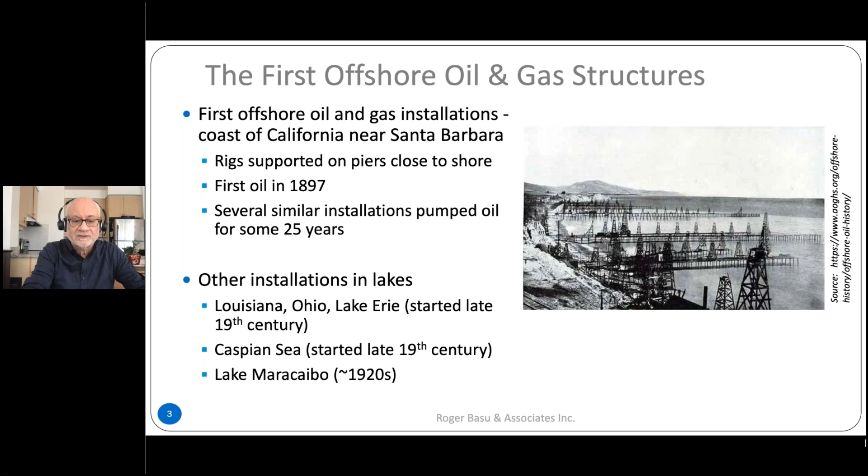So in the late 1930s, the focus shifted to the Gulf of Mexico, and that still is the main offshore oil producing area in the US. And you saw this sort of steady evolution of taller and taller structures.

1947 is often used as the starting date for these, in fairly shallow water, about six meters. Eventually, as they moved into deeper and deeper water, they got up to around 100 meters of water by 1967.

At this point, other parts of the world were opening up in a big way as well. There were already installations in the Persian Gulf, off the coast of Malaysia, Indonesia, and so on, but all fairly shallow waters.

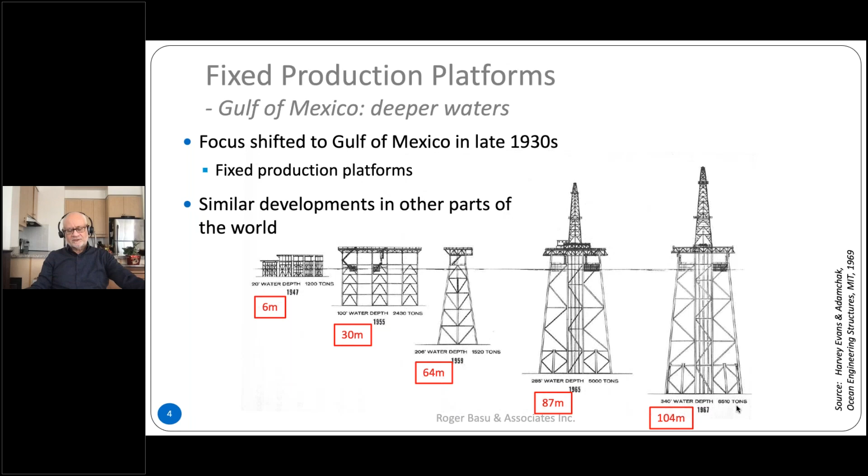The interest in deep water, I'd say, started in the North Sea, and this is the first time I got involved. The picture on the right is a structure I worked on, the Thistle Alpha platform, installed in 1976 in 162 meters of water.

Basically, a lot of the initial work was done by US engineers, who adapted their Gulf of Mexico type designs for the North Sea. The big difference was the climate was pretty severe in the North Sea compared to the Gulf of Mexico, if you exclude hurricanes. I remember the design wave height we used for structures like the one shown was 30 meters. This is quite a massive design wave, but it reflected the severity of the North Sea climate.

This is my experience, but at the same time there were other, more innovative structures going into the North Sea, especially in the Norwegian sector, where they started to use concrete in a big way. Many of you will know about these - the Condeep platforms and so on, many of which are still there. But I won't talk about those too much.

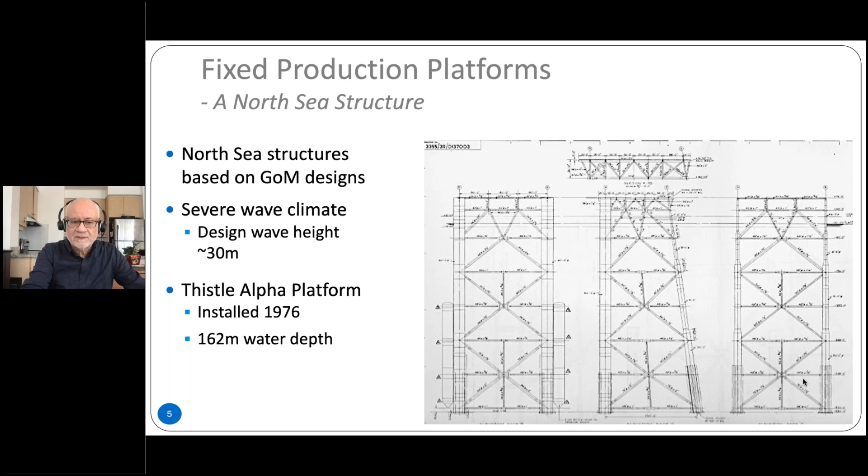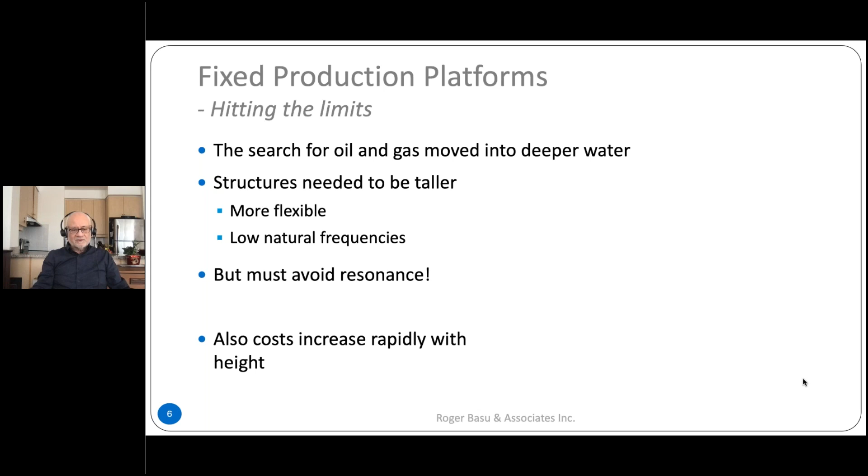This is a simple graphic depicting energy as a function of frequency for waves and for wind. Waves have frequencies of the order of 0.1 hertz, or a period of 10 seconds or so. The typical tall platforms I just showed had periods of the order of 3 to 4 seconds, so you're well away from the energy-bearing frequencies of the waves.

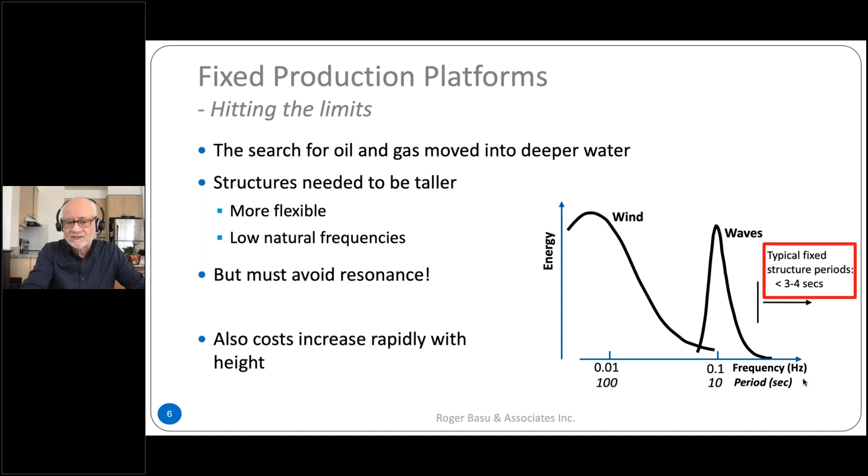But the danger is, the taller you make these structures, the more you start to attract resonant conditions from waves, and also the costs go up quite rapidly. So what did engineers do? They said, we can't make them taller and have the same sorts of stiffness - what if we make them deliberately much more flexible and avoid waves altogether?

So you got this class of compliant structures that were built. Some are still operating, even in the Gulf of Mexico, and there certainly used to be some off the coast of California - I don't know if they still exist, but I know the Gulf of Mexico ones do. They avoided the wave problem entirely by making extremely soft structures, with periods of the order of 30 seconds.

It's hard to imagine, but if you were on top of one of these structures, it would move back and forth, taking half a minute to do so - quite gentle movements, but nevertheless the deflections were quite significant. I can't remember the exact numbers offhand, but we got up to depths of 530 meters of water, which is quite deep for a fixed structure. But this is the limit.

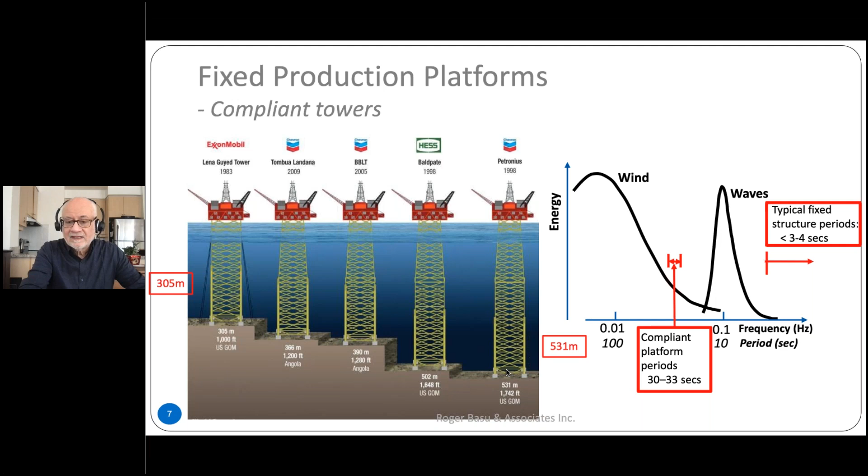If you make them even bigger, you start to attract forcing from the wind, because wind has energy in the kinds of frequencies we're talking about. So then we had to move to floating production platforms, and there's a variety of different kinds of these structures. Unlike the fixed structures in North America, the steel ones, which were all frame construction, you had a variety of different kinds when it comes to floating.

Looking very quickly at the kinds of structures out there, starting with the compliant one on the left that I talked about - that was the last of the very tall fixed structures. We started to move towards newer concepts, one of the first being the TLP, the tension leg platform.

A couple more bits. The next is what they've called a semi-FPU here, but we're more familiar with it as a semi-submersible. I'll postpone discussion of that till later, because it's a kind of special case. Actually, these existed before TLPs, so they've been around a long time, but I think it's kind of a special structure.

The next new variant was the spar structure, with several configurations. There's actually a lot of overlap between TLPs, spars, and FPSOs. What's shown here is a ship-shaped FPSO - I'll talk more about each of these in a minute. Left of that is another FPSO, but an unusual one: it's circular rather than ship-shaped, with a circular-shaped hull.

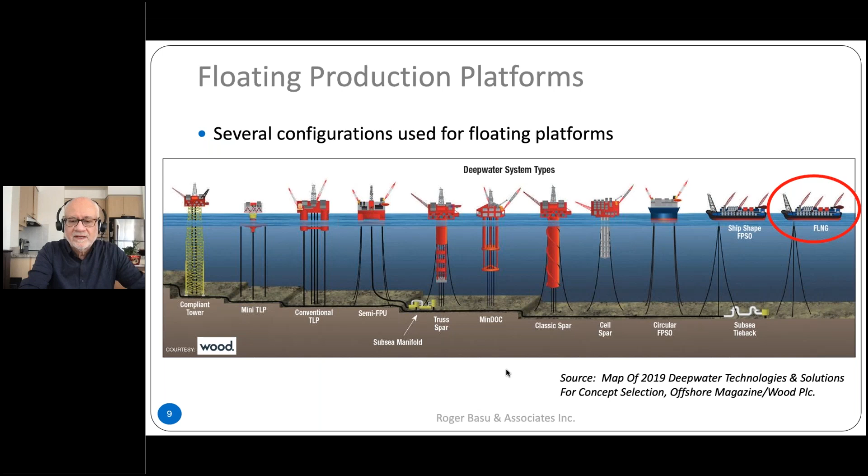If we look at each of these a little more closely, the TLP was first installed in 1984 in fairly shallow waters - the kind of water where you could easily put a fixed structure. I wonder if it was a kind of experiment, if you like. And it went in the North Sea, not the Gulf of Mexico. Then about 30 of these have been installed in various places, but almost all in the Gulf of Mexico. Chevron's Bigfoot TLP holds the record in terms of water depth, almost 1,600 meters.

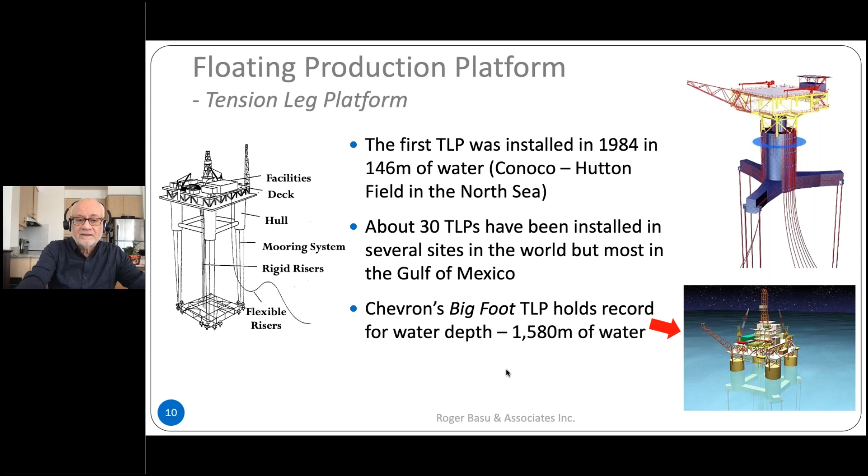Moving to the spars - the deep draft spar is a concept developed by an engineer called Ed Horton. I was in Houston later after that period, but there were a lot of stories going around in the industry, and one was that Ed Horton developed this in Houston in his swimming pool, using empty beer cans and Coca-Cola cans to do experiments. It's probably true because I heard it from very reliable sources.

Getting back to the spar, three different configurations were developed: the classic spar, truss spar, and cell spar. The classic one is the first design you see on the left, basically a big tube, and you'll see those strakes around it - that's to stop vortex-induced motions, which is something you do worry about in the Gulf of Mexico.

In certain parts of the Gulf of Mexico we have loop currents, and the currents are quite high. So there was a danger that vortex-induced motions would cause quite severe motions of these installations. The idea of the strake is to break up the coherence of that vortex shedding process.

The next one is the truss spar, partly to address the vortex-induced vibration problem, but also solving other issues. I guess it's a little lighter - truss construction is usually the lightest you can make. I know the bottom plate was there for a specific reason - it's called a heave plate, and it tries to minimize the heaving of the structure.

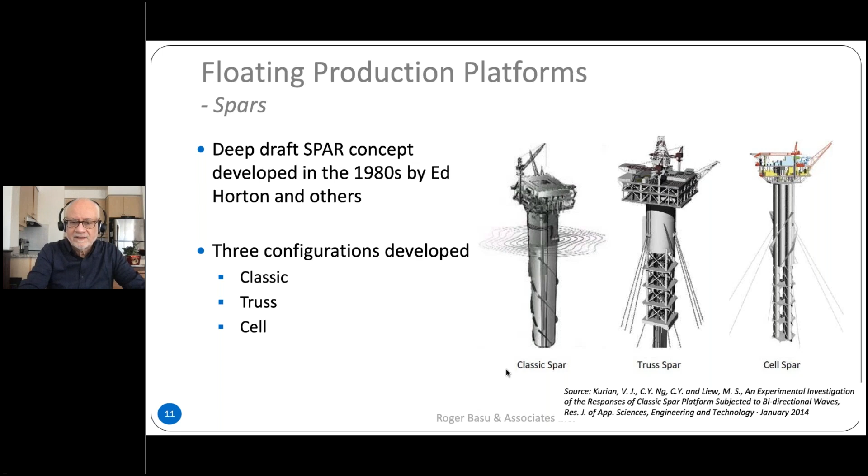The last one is the cell spar. I think only one of these was ever built - it's basically replacing one large tube with a number of small tubes, and that was more from a construction point of view. It could be built in lots of different yards, whereas the ones based on large tubes could only be built in a few yards. So that's the origins of the spar.

The first production platform saw service in 1997 - the Neptune, which I think still operates in the Gulf of Mexico, in 588 meters of water. There are about 21 installed, most in the Gulf of Mexico, just 2 in other areas. And now you're getting into really deep waters - Perdido is in the Gulf of Mexico, in almost 2,400 meters of water. These spars tend to be heavier than equivalent semis and TLPs.

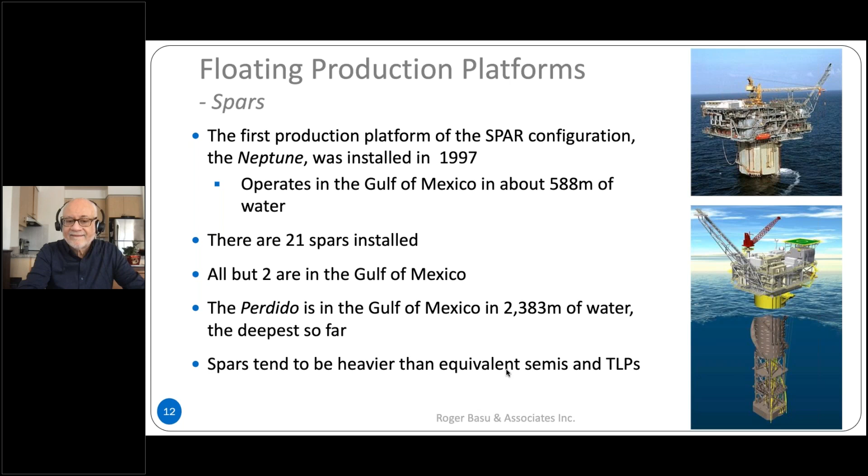Okay, going back to the semi-submersible, I said I would return to this. These are quite interesting - they have an interesting history. They actually started as submersibles, so that kind of configuration would be towed to site, and then they would ballast the pontoons.

It would sit on the seabed, and they would do whatever they needed to do, usually exploratory wells, drilling exploratory wells and the like. But one thing they did notice is that in transit, when moving these units, the motion characteristics were unexpectedly good. That was mainly because the pontoons were quite a lot below the surface of the sea, so the wave motion wasn't having as big an effect as it would if it was on the surface.

So it evolved from that. They've been around a long time. It's the second most popular floating production system. You'll see them in many parts of the world: Brazil, North Sea, Gulf of Mexico, they all have large numbers of semi-submersibles doing production work. The deepest water, again in the Gulf of Mexico, is the Independence Hub, still operating.

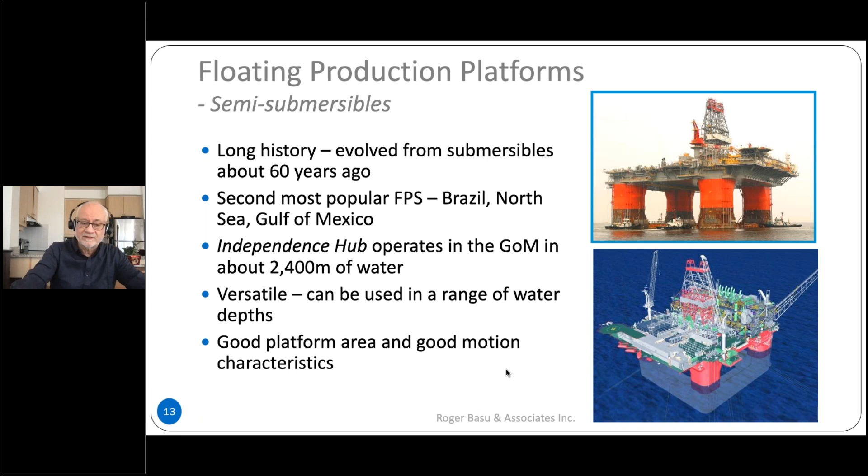The semi-submersible is really versatile. It can be used in a range of water depths. It's similar to the FPSO in that regard. It has good platform area, just the nature of it. It's unlike the spar, where your whole processing plant is over one tube. You can spread it out. In the case of the semi-submersible, you've got 4 legs, and you can put them fairly far apart, so you have a nice area to work with. And it also has reasonably good motion characteristics.

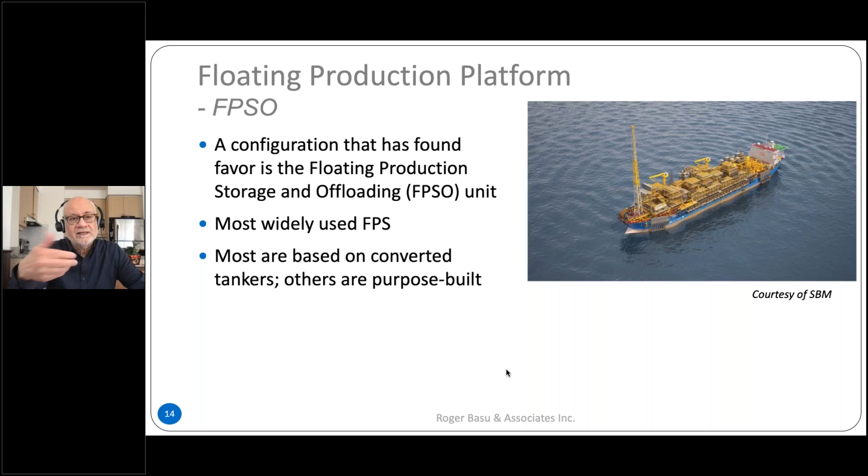Now, the FPSO is the most popular floating production system. It's basically a ship-shaped structure. The hull is used for storage, and it supports the plant on top. It's quite crowded. Most are based on converted tankers, so tankers that have maybe got another 5, 10, 20 years life will be converted for oil and gas extraction purposes. Very attractive in places where you don't have a lot of infrastructure in terms of pipelines and so on. So you have to store the oil, at least temporarily, and a shuttle tanker would come and remove the oil.

So in concept, that's quite similar to the FLNG. The same sort of thing, but this has an added sophistication. It not only extracts the fluid from the seabed, but it also processes it and turns it into liquefied natural gas. If you look closely at this one, this is the Prelude off the coast of Australia. It's very, very compact, with a lot of equipment on board the vessel. It makes it kind of large, almost 500 meters long, as you can see from the numbers down there.

And alongside, you see an LNG carrier. This is a shuttle carrier. So every so often it'll come along and take off the LNG and move away, and then come back a week later or whatever the cycle is. So that's the last of the floating production that I wanted to talk about.

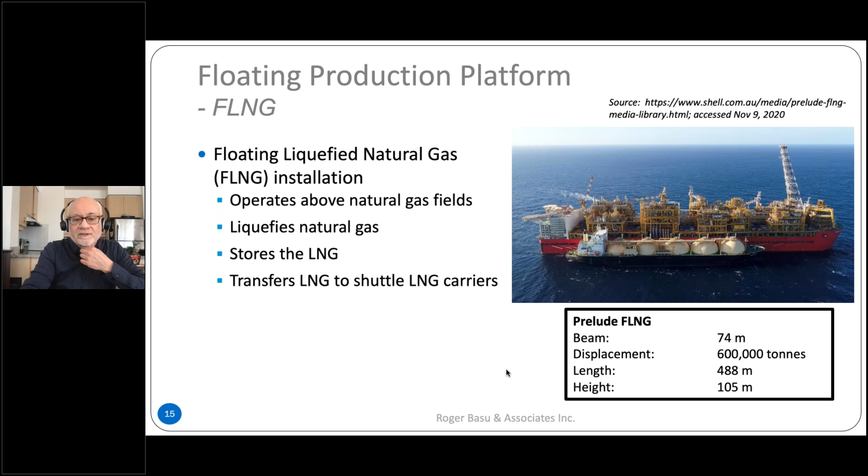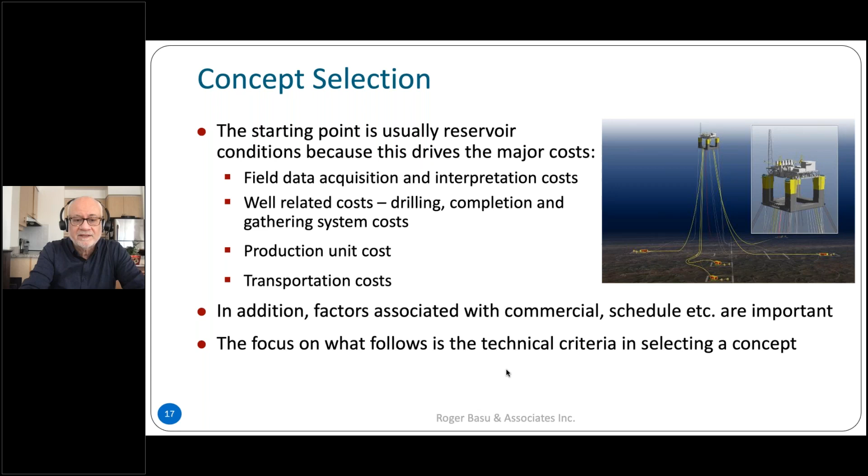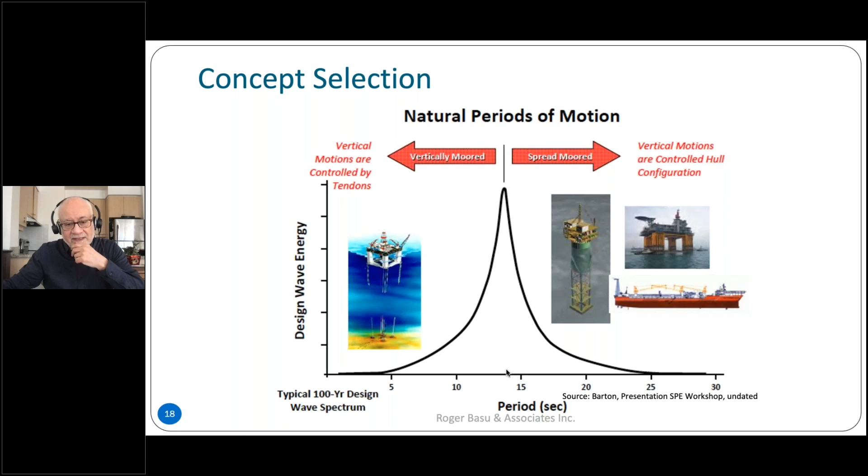For example, under functionality, it talks about dry and wet trees. That's the sort of equipment that interfaces between the well and the installation. If there's a lot of movement in your structure, like a semi-submersible or an FPSO, you tend to put these on the seabed. If you can, you put them on the installation, as you often do with spars and TLPs, because that equipment is easier to get to, easier to maintain and repair, and so on.

Water depth is another major consideration. Things like spars and TLPs are better for deeper waters, and that goes to the previous graphic I showed, where the frequencies matter. Semi-submersibles and FPSOs are much more flexible in that regard. They work in any kind of water depth, any reasonable water depth.

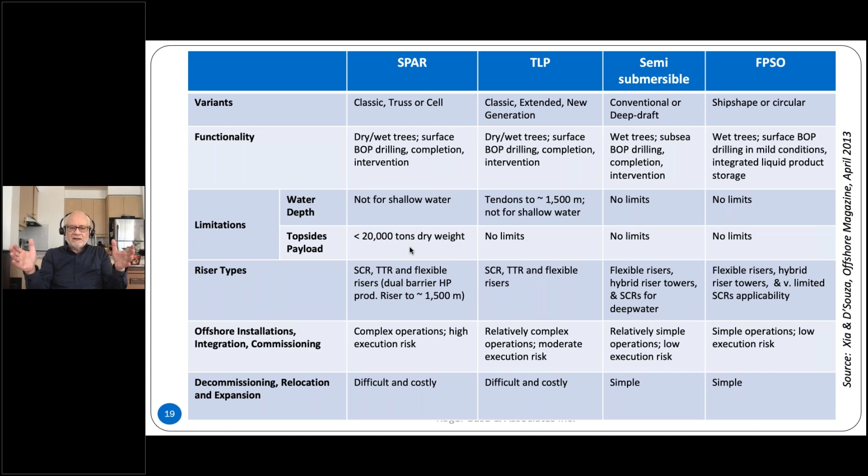Okay, payloads. Again, this is fairly obvious that the spar has some limitations. The others don't have any real limitations, but the spar does, because you're basically supporting the whole installation on one big tube, so the platform area can't be that big. Hence, they tend to be on several levels.

Riser types are again associated with movement. If you're more restricted, if you've got installations that can move around a bit, you have to use flexible risers in that case, but you have more flexibility when using platforms that are stiff and don't move around as much.

And the last two categories are to do with installing, decommissioning, and commissioning and all the rest of it. The easiest ones to talk about are semi-submersibles and FPSOs. You just get towed to site, you put down some moorings—I'm oversimplifying, I know—but it's relatively simple with a semi-submersible or an FPSO.

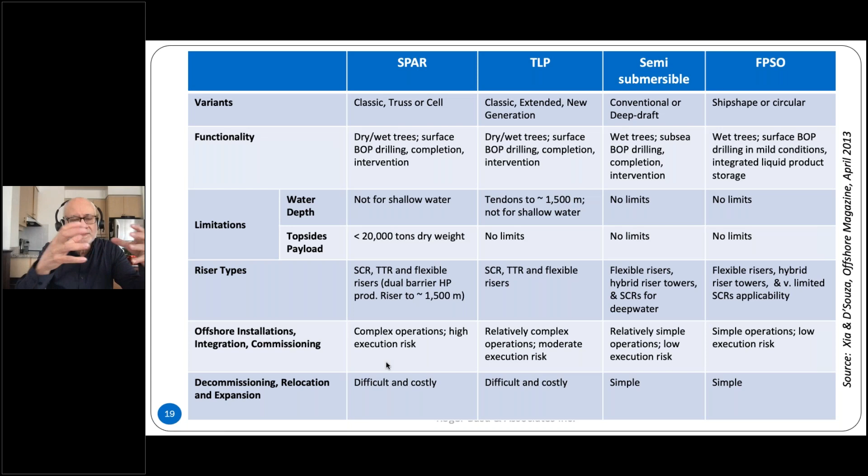TLPs and spars are much more difficult to deal with, especially the spar, because these usually go out floating on their side and then are upended, and then the moorings are added. So decommissioning something like that is much more involved than an FPSO, which is basically a ship and can be towed away relatively easily.

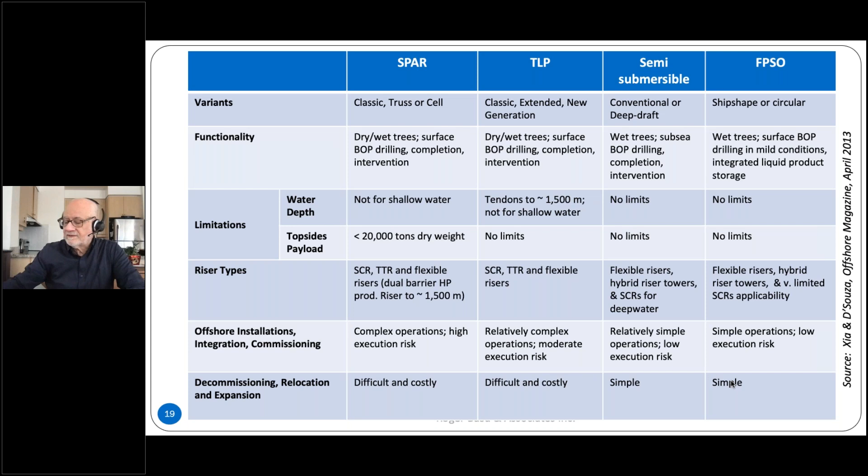Okay, just a couple of words about drilling platforms, because it's kind of relevant to some of the stuff we talk about later on, right at the end of the presentation actually. I've already talked a bit about semi-submersibles and submersibles, so I won't dwell on that. But these are units that you need typically for a short period of time, not for 20 or 30 years, but for several months while you're drilling exploratory wells.

And if the field turns out to be interesting to the operators, they'll also want some production wells to be drilled. They'll be capped and moved off, and then a production system will come and that will be installed. So again, water depth is the important determinant of which one you use.

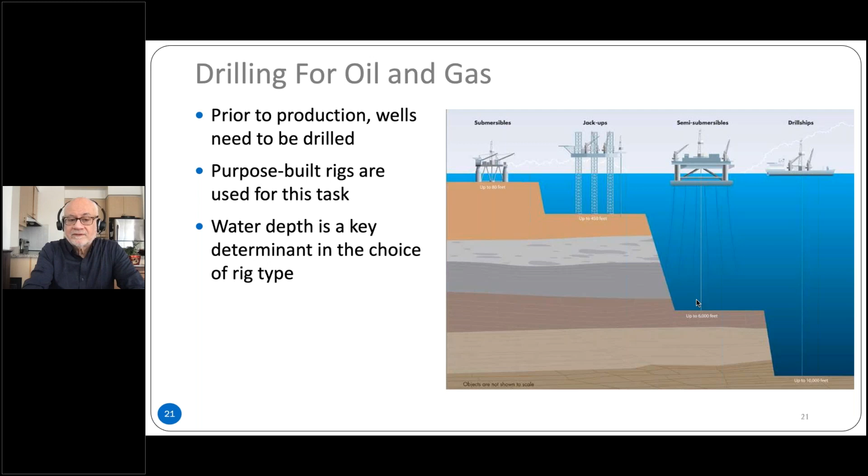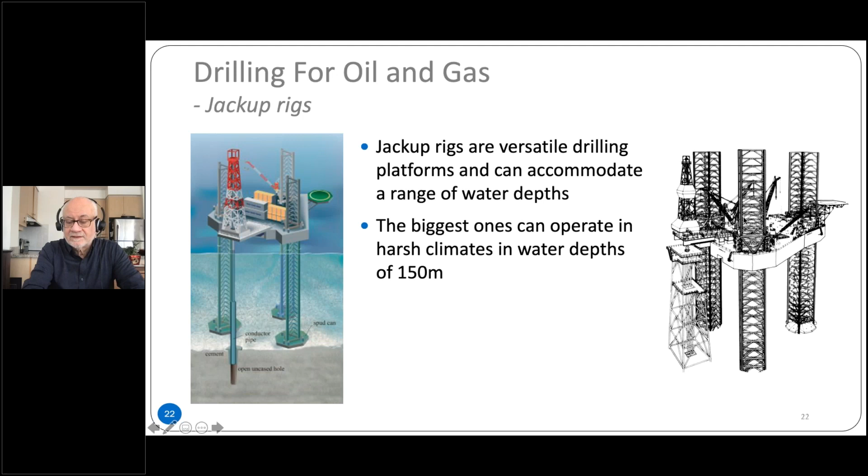If it's relatively shallow, up to about 150 meters, jackups are a very attractive option. They move around like a ship—the hull acts as the flotation. They can be towed like that with the legs up in the air, basically. And then when it gets to site, the legs are jacked down and you get a nice firm foundation to do your drilling.

If it's deeper than that, you use things like semi-submersibles and drill ships. As we've discussed before, these are quite flexible units in terms of water depth. You can have them in shallow waters—in that case you use moorings typically. If you're in deeper waters, it's usually done by dynamic positioning, so you have thrusters that keep it in place. It's kind of expensive because you use a lot of fuel when you're trying to keep it positioned, especially if there's big currents and waves around.

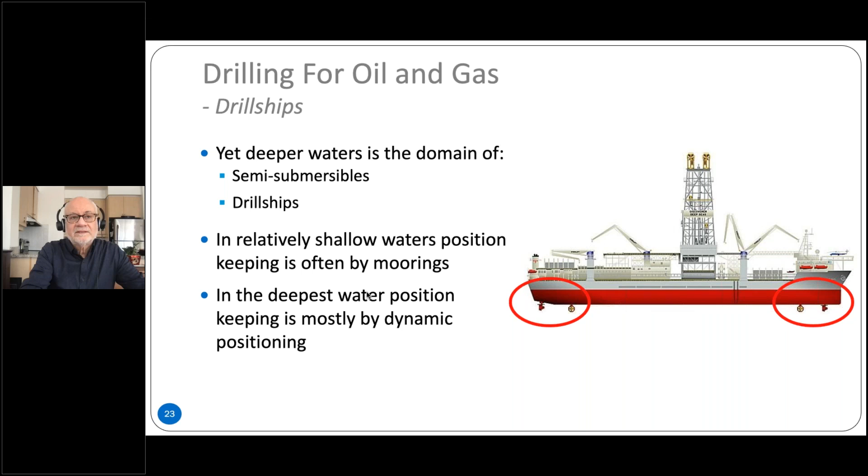Okay, so that's a quick survey of fixed and floating offshore structures. So I think I can move to offshore wind. The focus here is going to be a bit different—I'm going to go back earlier. We are just in the beginning stages, at least in the US, so I wanted to set the scene. The first graphic I'd like to start with is the transition that's happening in the US, and this will give you a very good idea. Actually, this kind of surprised me, and I suspect a lot of people will be surprised by this.

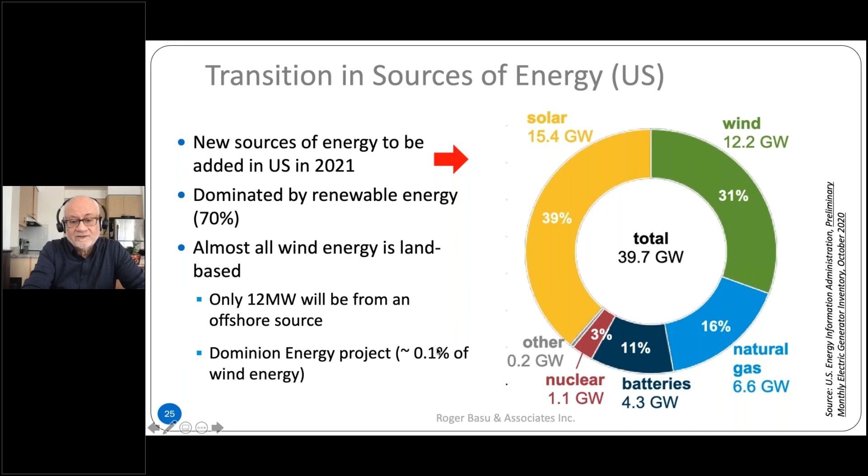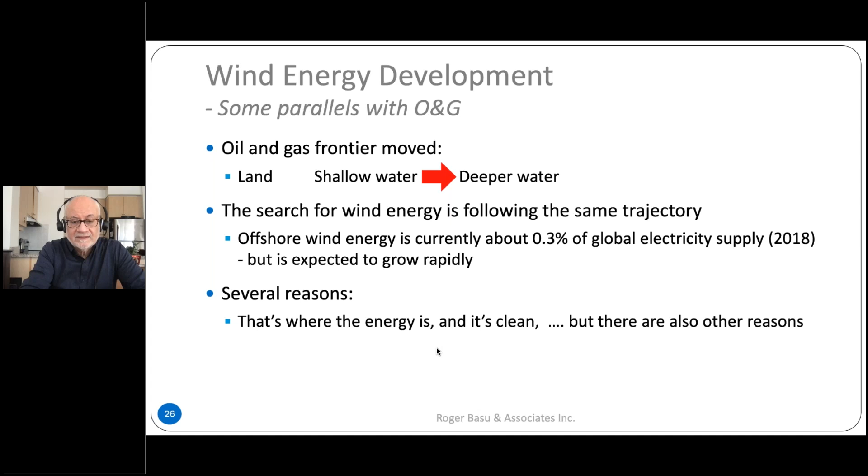So we start to see the parallels already with oil and gas development. We started on land, moved to shallow water, and then to deep water. So wind is following exactly the same trajectory. Offshore is currently quite small as a percentage of global electricity supply. I've got this number from 2018. I expect it's a little bigger now, but 0.3%, not a lot. But it's expected to grow rapidly, and we'll talk about that later on. There's several reasons for it. It's clean, obviously. We're in this transition to greener sources of fuel, but there are also other reasons. All right, so let's start with land.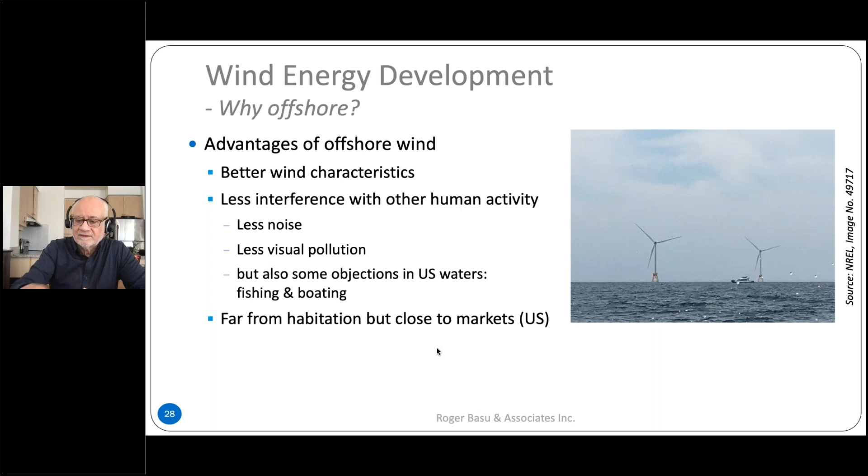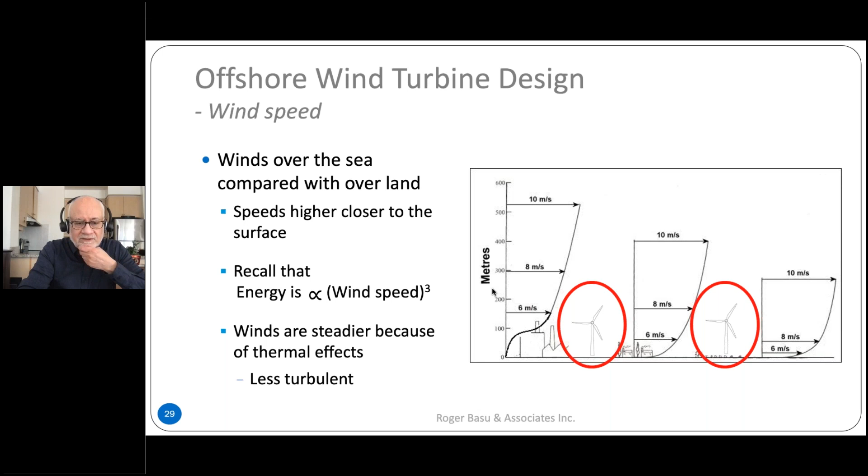This is the sort of thing designers of suspension bridges worry about, because you can get them up to, typically, 2,000 meters apart, one end to the other. So what's being experienced at one end is quite different to what's being experienced at the other end. So once you get these very large wind turbines, 15 megawatts and above, you're going to have to worry about these sorts of things.

The other thing that's less of an issue but sometimes important, because I've already seen people mention this in papers, is wind veering. This is not an issue if you're close to the ground, but if you start to move up into 100, 200 meters, wind veering might be an issue. Wind veering is the change of direction of wind as you go upwards, so that might be significant for something like a wind turbine.

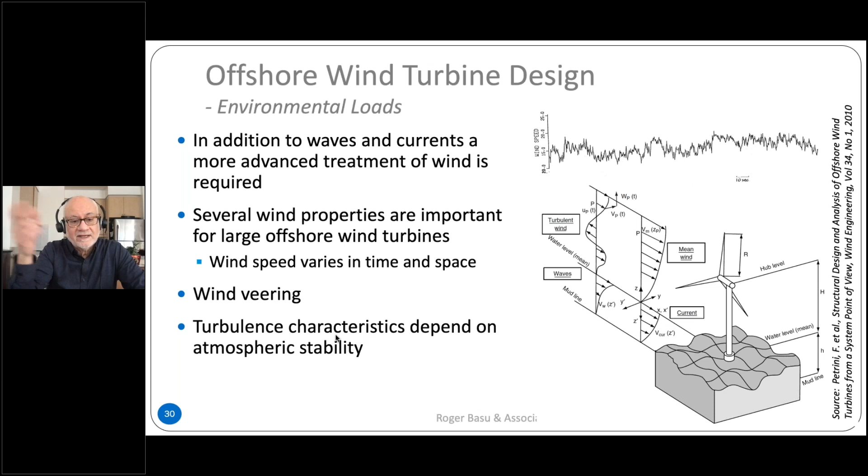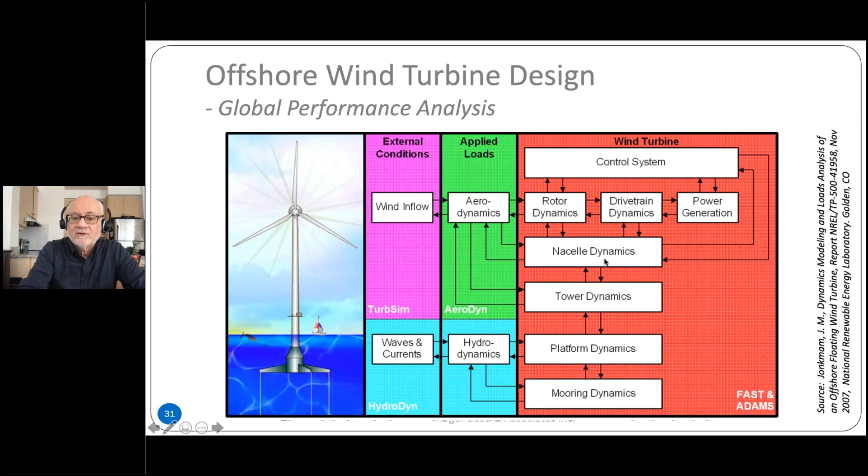If I take the wind and apply aerodynamics, I can get some aerodynamic loads on the whole system, and the same with the hydrodynamics, though that tends to affect mostly the platform itself. But it can affect all the parts of the installation above the sea level. You can see that it's an entirely highly dynamic system, so you have to have pretty good dynamic models of the wind, the waves, and the current, because they all play a role in the response of the system.

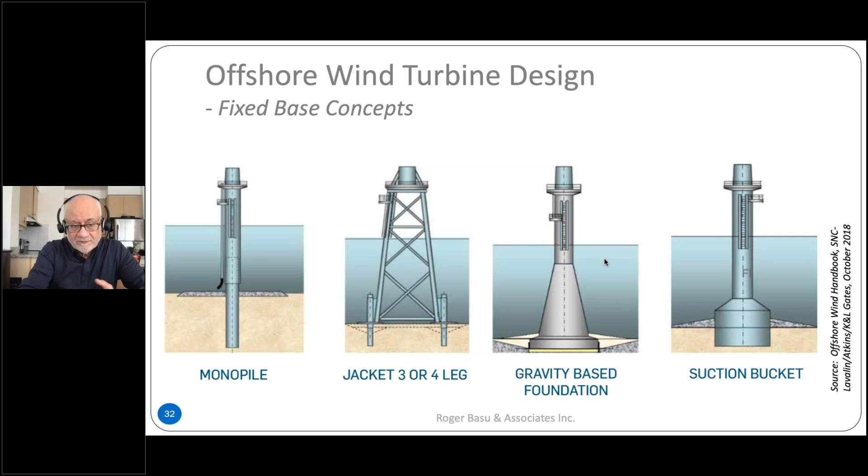Looking at the kinds of foundations these lines have, I've just put three or four out there - there are others. These are the typical fixed base concepts. When you look at floating concepts, you'll see some of the same terminology that was used in the oil and gas floating structures used here. Of course, they're already talking about different concepts that are unique to offshore wind, and that's exactly what you expect to see. That's what happened with offshore oil and gas - you started with structures basically adapted from the land, but then developed unique configurations more suited to the sea.

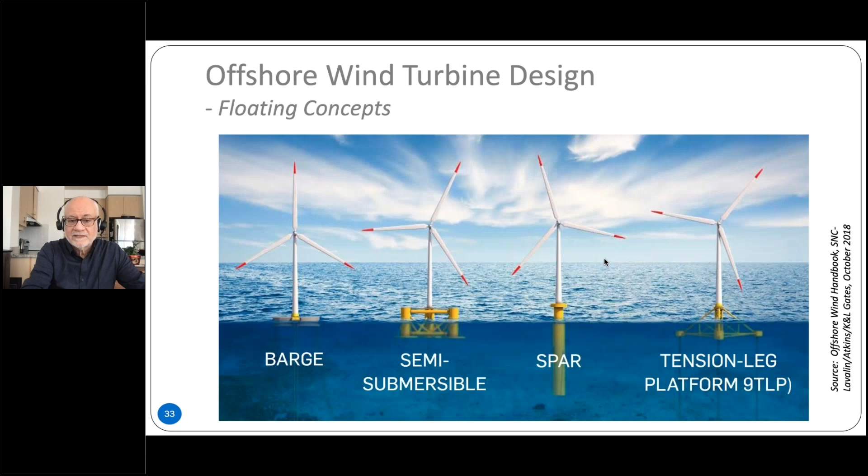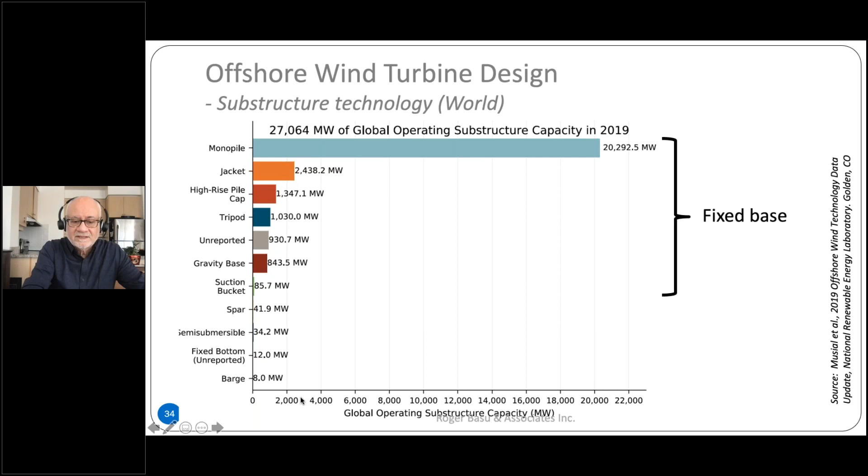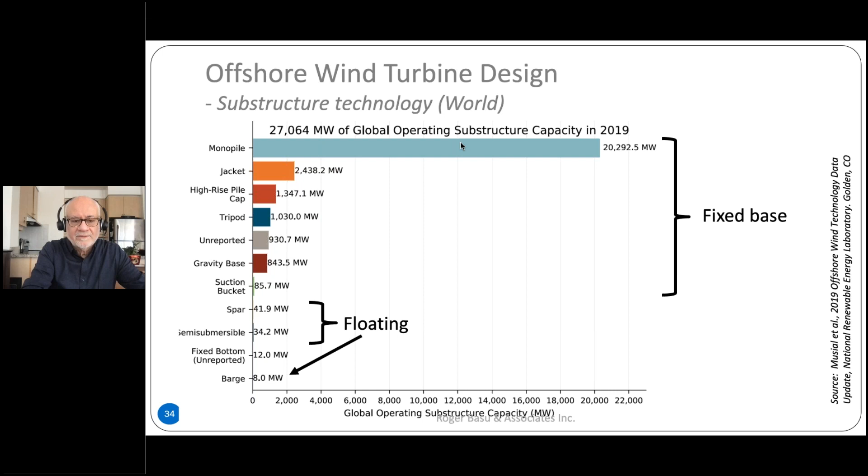We've talked about fixed bases and floating bases. What's actually happening? This is slightly out of date, 2019, but it will give you some idea. It's dominated by fixed base - the world's offshore wind turbines are almost all fixed base, and within that it's the monopile that dominates. This shows installations in terms of megawatts of power, what kind of foundation the installation has. So monopiles is more than fixed base and floating put together. There's hardly any floating installations as a percentage, but more are coming, as we know, some big ones off the coast of Scotland, and I believe Spain or Portugal - there's a new one recently announced. So for the time being, fixed base is what we're looking at.

Some of the challenges unique to the US context: hurricanes and earthquakes. I don't believe there's a lot of experience with offshore wind farms in these kinds of regions, and this is what we have to contend with offshore in the US. Hurricanes - the East Coast, where most of the focus is right now, is a hurricane-prone region. Some people argue you're going to see more and more of those in the future, and they might even become more intense, so it's a mixed wind climate. Not only do we have hurricanes, but we have normal storms too, so both are significant on the east coast of the US. Then once we move to the west coast, that's a very strong seismic zone, so you have to worry about the effect of earthquakes on your structures.

There's three issues I'd like to raise as to the reasons why the focus right now is on the east coast of the US.

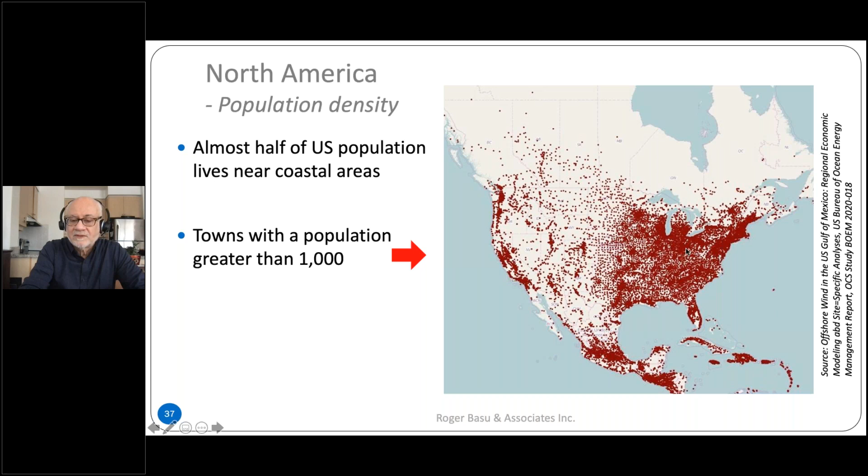The first is population. This graph shows all the towns and cities that have a population greater than 1,000 - just one way of showing population density. You can see that the population is quite dense on the east coast, especially the northeast, but all the way down to Florida and in the Gulf of Mexico, Texas and Alabama - all heavily populated. People like to live near the coast. The same on the west coast. So it makes sense to have wind farms close by to where your consumers are.

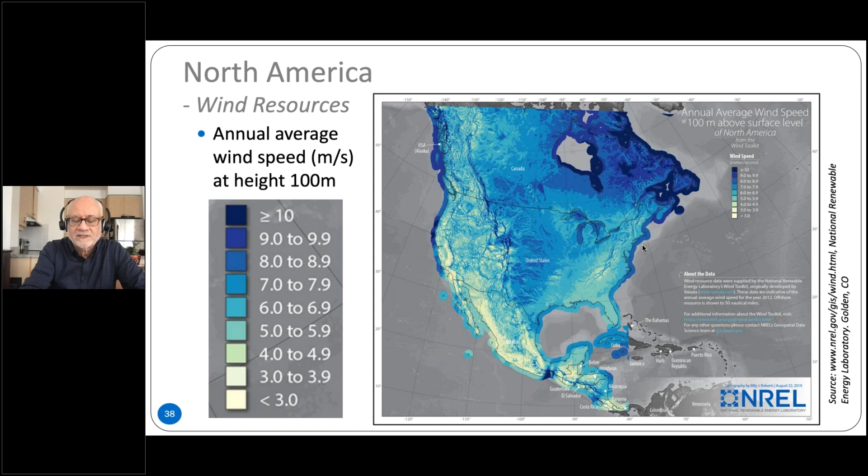The other thing is wind resources. This is a plot of annual average wind speed at a height of 100 meters - that's the region we're interested in for offshore wind farms, at least right now, maybe bigger later on. The darker the blue, the more intense the wind. The coastal areas see more wind for reasons we've already discussed - on the west coast, the east coast, less so in the Gulf of Mexico, but certainly the northeast and the west have very strong winds. So that's another reason why it's attractive to put offshore installations in the sea.

If you go to the West Coast, it's a different story. There's hardly any continental shelf - it goes out for a short bit and then dips down very rapidly. So installations there will be in more than 60 meters of water. That also applies to Hawaii, another area of interest for offshore wind farms. So those are the three reasons East Coast is very attractive: one is population, two is the wind speed I showed you, and then the large continental shelf.

Now this is something I was not going to talk about, but after listening to people who know more about the subject than I do, they say this is a bit of an issue. When European operators come to North America, their experience is quite different to what they're accustomed to in Europe in terms of getting permissions and so on.

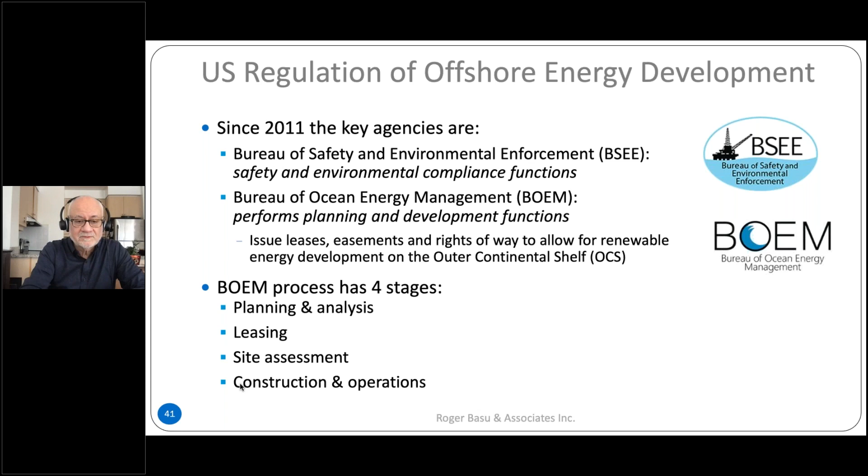The observation I've heard - I don't have direct experience of this, but more than one person has said - the US permitting process is quite complex and lengthy. You have to deal with at least 3 levels of government: local, state, and federal agencies. So there's quite a lot of interaction with government agencies, and these apparently present a challenge for how easy it is to get money to go ahead with your project.

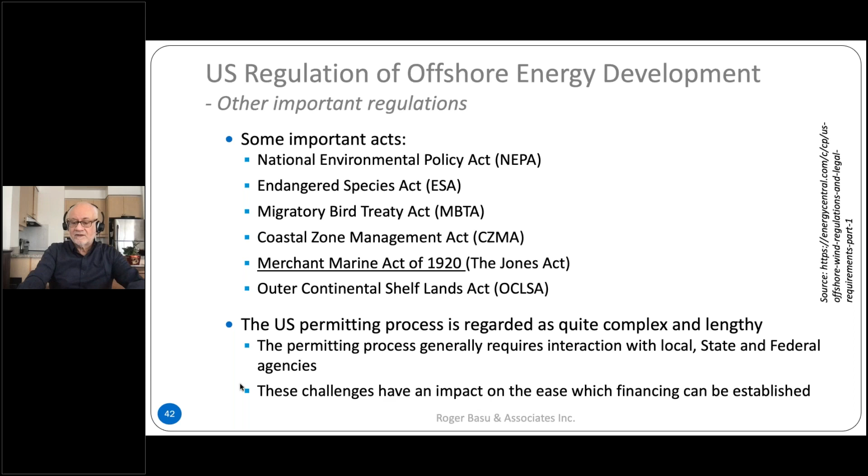Okay, the Jones Act. The basic requirement is that a ship traveling carrying goods from one US port to another US port has a number of restrictions. It's got to be 75% US owned, it's got to be built in the US, crewed minimum 75% by US citizens, and the ship has to be registered in the US - it has to be a US flag.

Of course, there's pros and cons. From the US point of view, it maintains a marine industry, you maintain a maritime workforce. So these are regarded as advantages.

The main downside from the point of view of offshore wind farms is the expense you have to go through to build a ship to provide wind turbine installation vessels, supply vessels, that kind of thing. This was only settled as an issue last month, or maybe in December, where they said offshore wind farm work is covered by the Jones Act.

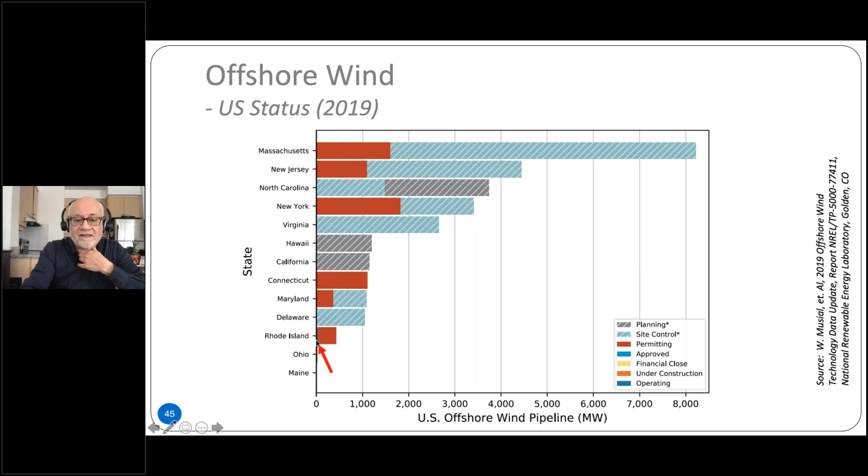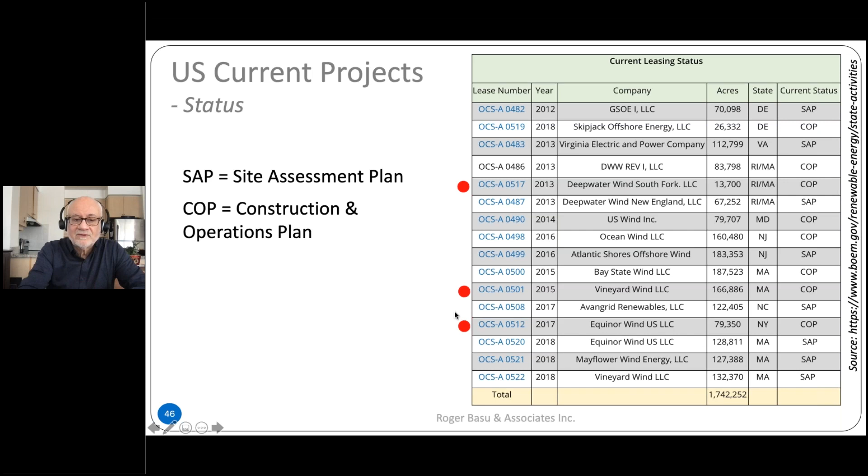And so it's the COP ones that are more imminent, they're close to becoming operational. I've highlighted 3 of them because those are the ones I'm going to talk about. But I'm going to start by talking about one that's not on that list, because this is the only operational wind farm right now in the US.

This is an Ørsted project that started back in 2016, a small farm, 30 megawatts. It recently had some problems with the undersea cable, they had to relay some of it, and that's actually been completed only just last month, so it will restart again. So it illustrates - once they lost this power, they went back on diesel generators. This island, Block Island, gets its power from diesel generators until we got the wind farms.

Okay, so the next one is the South Fork offshore wind farm, Ørsted and Eversource. Eversource is a utility company, so they've gone into partnership. This is going to be built off the coast of Rhode Island and Massachusetts. Even though it's regarded as a Rhode Island, Massachusetts project, that's simply because the farm itself is off their coast - all the power goes to New York. It'll travel westwards and make landfall in Long Island.

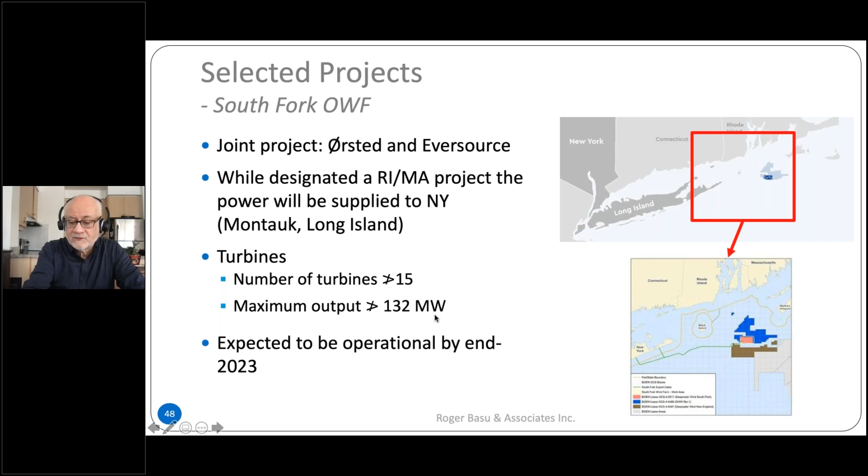They haven't defined the exact configuration, but they're saying there won't be more than 15 turbines, and the maximum output will be 132 megawatts. This is supposed to be operational by the end of 2023.

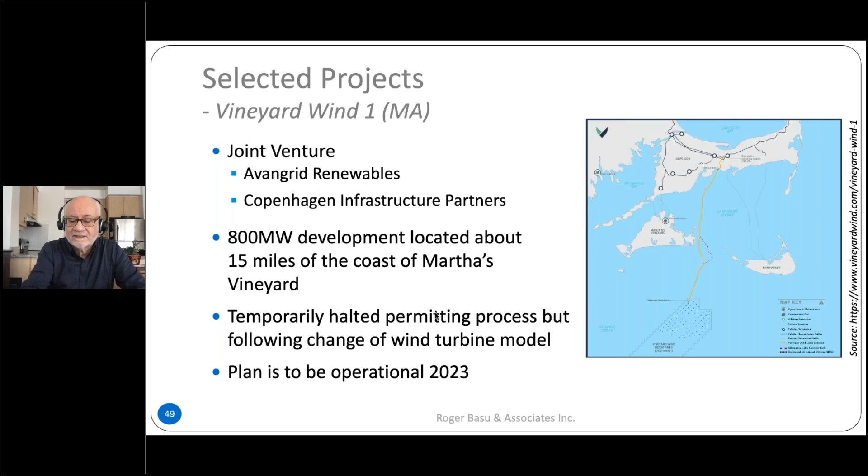The Vineyard project has got the go-ahead, I believe. It did stop temporarily. It's a much bigger development, jointly by Avangrid and Copenhagen Infrastructure Partners, 800 megawatts, almost getting up to 1 gigawatt, 15 miles off the coast of Martha's Vineyard, near Cape Cod, Massachusetts. In the middle of getting permissions from BOEM, they decided to change their wind turbine model, and that delayed things. But it seems to be back on track, and again will be operational by 2023.

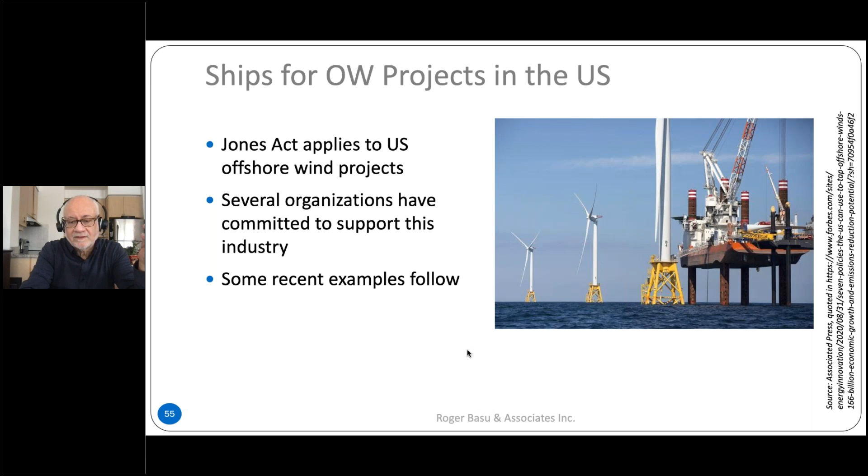They expect rapid expansion in the coming years. So just some examples of the ships that have been recently ordered.

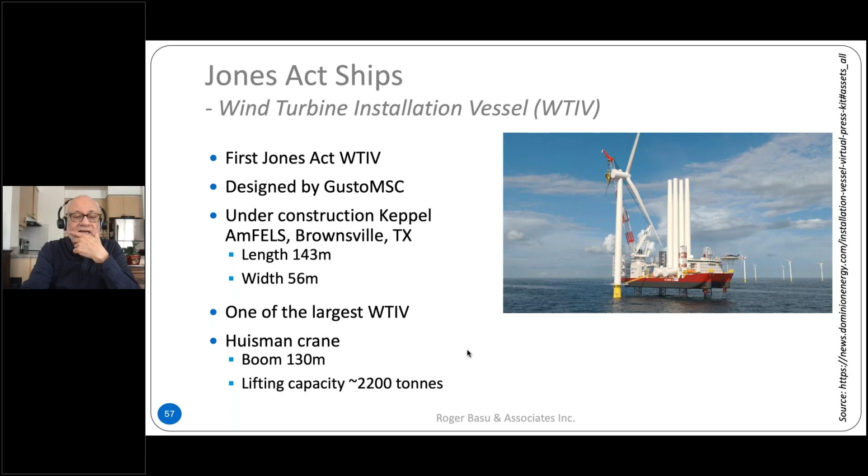That's a quick overview of the offshore field and oil and gas field. It looks like it's really taking off now in North America, and we expect to see some exciting developments. Just a few concluding remarks.

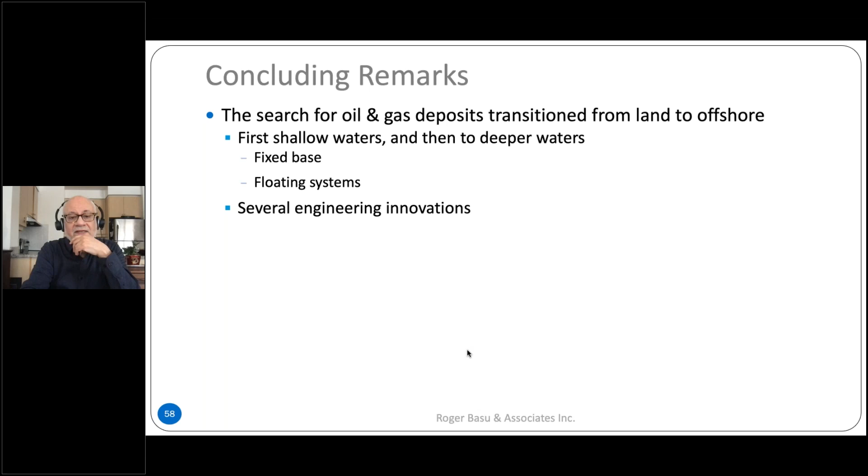The search for oil and gas transitioned from land to offshore, first shallow waters, then deeper waters. At the same time, you went from fixed-base structures to floating systems. Several engineering innovations, the design of concepts like the spar and semi-submersibles, all came from innovations as they moved into deeper and deeper waters. Offshore wind is following the same general trajectory, so we're going to see some really interesting concepts for offshore wind, especially when they go to floating wind.

There are lessons to be learned from the offshore oil and gas industry, and many of the people with expertise in oil and gas are moving into offshore wind. There are important differences, of course, that have to be taken into account.

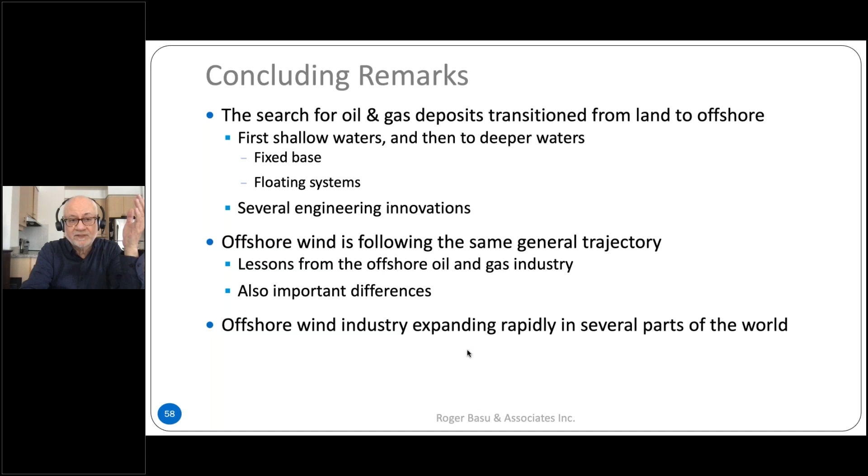Offshore wind industry is expanding rapidly in several parts of the world. It's not only the US, of course. There are many more projects in Europe. China is investing in a big way, and several other places. So despite all the challenges, I think the US is a good example of where you'll see big, rapid growth in this field. So that's all I had to say.

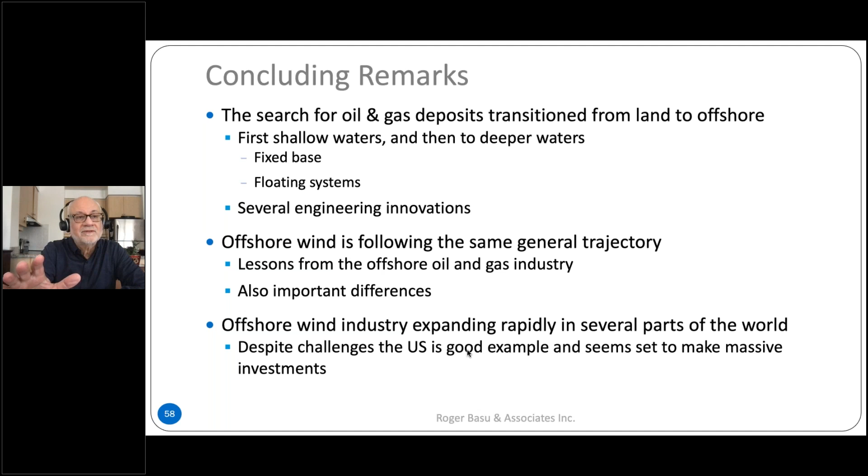I'm happy to consider any questions you have. I'll answer them if I can. So thanks very much.